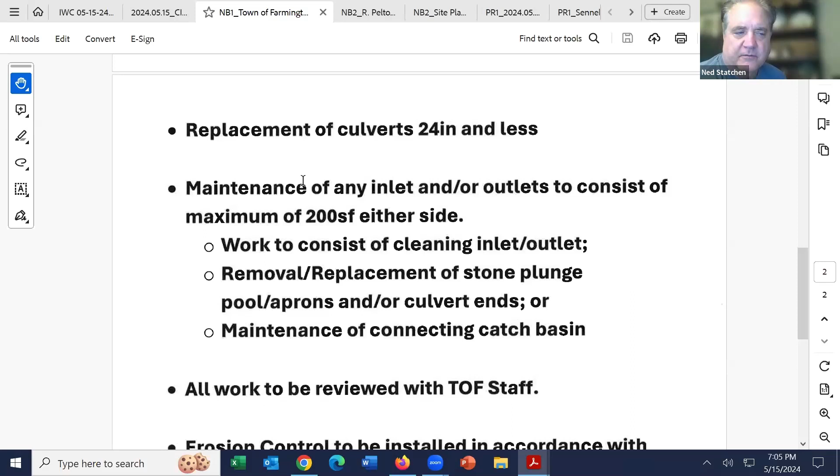This is Rich, so moved. And a second, Dave will second. Okay, the motion's been made and seconded that this is not a significant event and it's more maintenance. All those in favor say aye. Aye, aye, aye. Opposed? Abstain? Okay, motion passes.

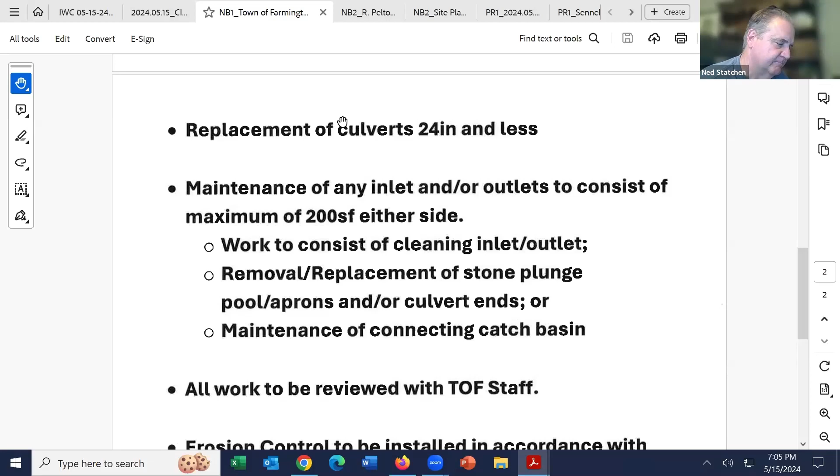Good luck with it, Bruce. Thank you. Oh, no decision? No decision. Don't let us down. I did vote on that. Don't we have to vote? Yeah, we have to vote. Oh, sorry, oh my gosh. I thought that I was. I had a tough day.

All right, so that was just for the significance vote, it's not significant. Now I'll entertain a motion to approve the application. This is Rich, so moved. Second, Mark. Whatever, whatever. Okay, motion's been made and seconded. All those in favor, say aye. Aye, opposed? Abstain? Okay, motion passes.

Thank you, commissioners. I'll sit down with the highway department and we'll go over this step by step.

All right, so the next item on the agenda is 161 Talcott Notch for a solar panel array. Is the applicant here to explain the proposal? Yes, I'm here. Just introduce yourself and what you're here for. Yeah, my name is Thomas Kenney. I work for EcoSmart Home Services, that's the DBA name of R. Pelton Builders. They're a local family-owned company, run by husband and wife.

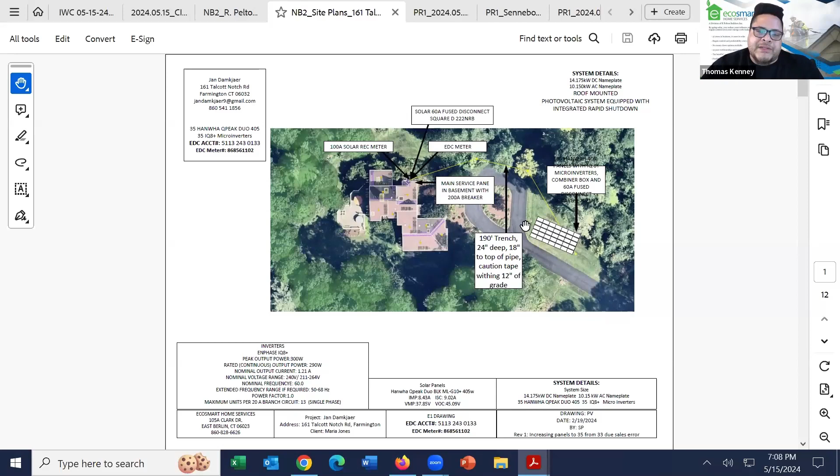So what you're looking at here is the site plan we submitted to the utility, Eversource. Unfortunately, we're redirecting the trench away from the wetlands, so it'll be a shorter conduit run and trench. The trench is about 190 feet long. It's a shorter run from the ground mount system to the meter and electric panel.

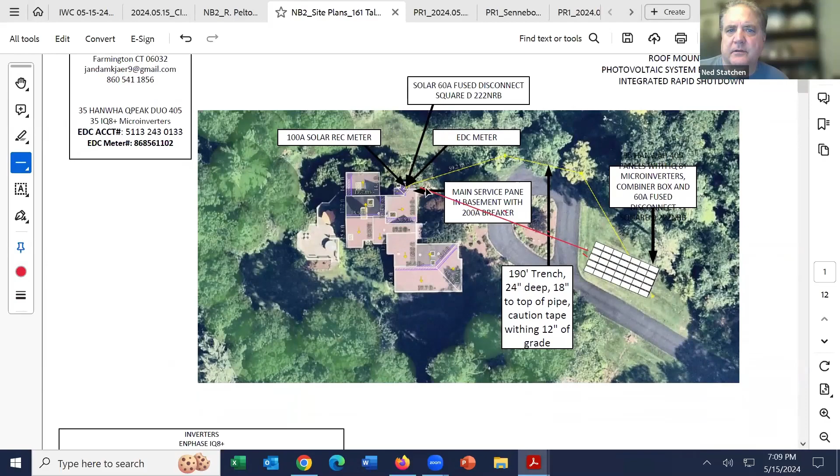A question for Bruce: whereabouts is the waterway or wetlands on this? I can answer that. Here's the house, and there's the portion of the driveway. Let me zoom in. Talcott Notch is up here, north is up, the driveway comes in, here's the circular driveway, here's the house. The array is going in roughly here, crossing the driveway to here.

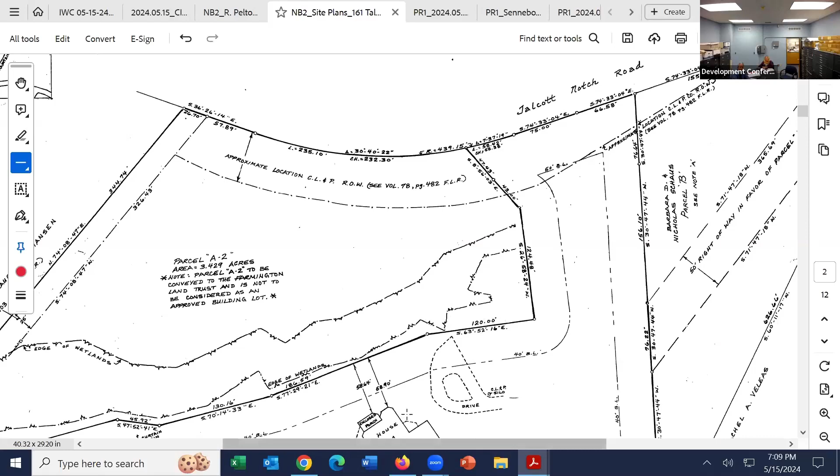The wetlands are in this area, which is conveyed to the town of Farmington as land trust property right in here. There's the wetlands right in there, so they'll be running that through this disturbed area. Let me zoom in here to help you guys out a little bit.

So Talcott Notch is here, Mountain Spring Road is here... sorry, the other way... one more, 161, sorry, 161. Right here, the house is right here, Talcott Notch is here. The array is right in this area here, and the wiring will be here. The wetlands are all up in here.

These flow down, run underneath Glen Eagles as I said, and come out and eventually run out to the Farmington River. As you can see, it's all lawn in the upland review area and driveway, so there's no tree clearing as part of this. No, there's no tree clearing at all.

Bruce, if you actually use the map layer on the right-hand side, you can select the wetlands layer. Yeah, exactly, so that's right down in here, and this is the Farmington Land Trust property. Sometimes when you turn that on it's not accurate because it's showing it on his property, and it's not. So based on that map, it's really all on this property here.

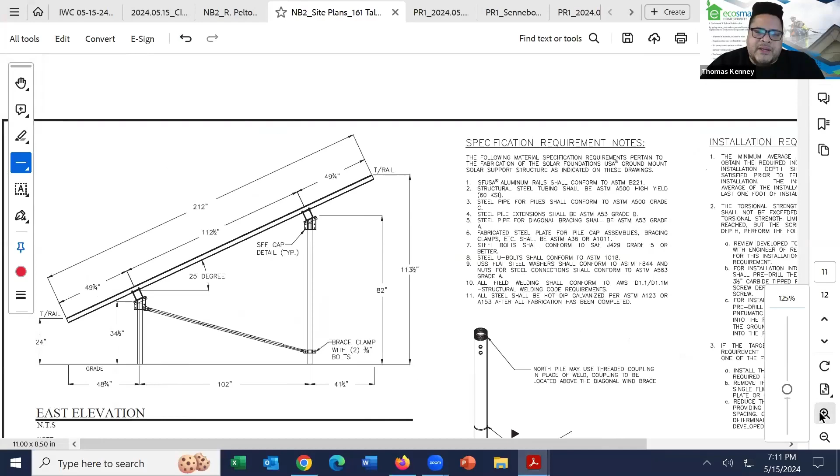Can you tell me a little bit about the construction, and how large the post is that's going to be holding up the array? Yeah, it's going to be a helical pile, like screws, if you will, that'll be used. I think there were some other documents in the attachments. We had this engineered by Solar Foundations, who does a lot of our ground mount projects, and we also provided a letter from the engineer at Solar Foundations. So it'll be like a helical screw.

So it's not going to be a big impact on the ground or anything like that. We do have to run a trench and conduit from the ground mount, but it'll be very low impact for the ground mount installation. It's a helical pile screw, basically. The helical pile is only a 2 7/8-inch diameter schedule 40 pipe. If you've ever seen those go in, they pull up with a little skid steer with a pneumatic screw attachment, just go right over the top, turn it on, and it goes right down.

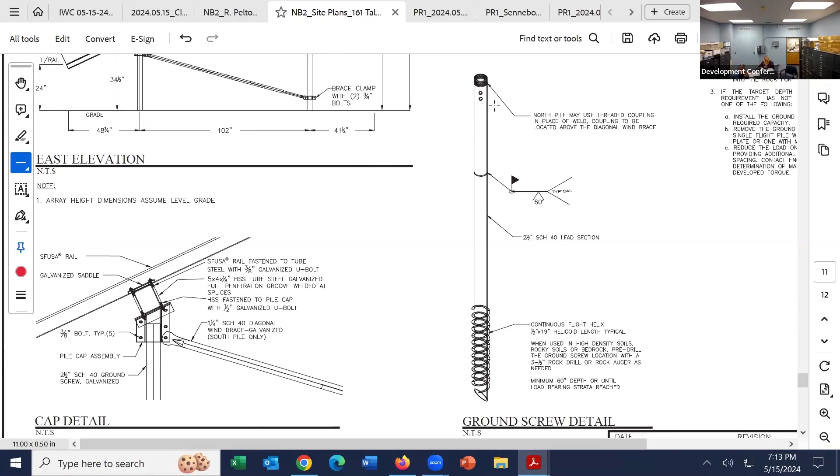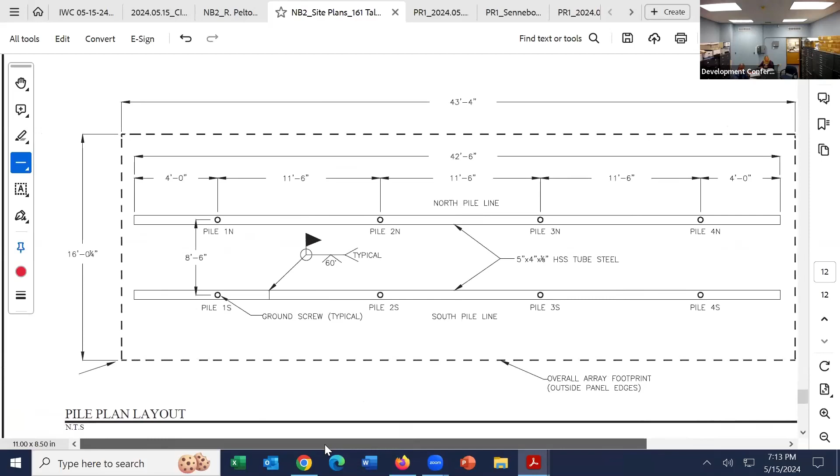The array is just over 43 feet long by 16 feet wide. Okay, back to the site plan. Here's a picture of the driveway - the array will be in this area here, right Thomas? Yes, I think you can see the yellow poles there in the photo. Yeah, right there, right here.

All right, well, let's ask the commission if they have any questions. Rich, do you have any questions?

Not really. I just saw in the picture, it looked like there was a couple dead trees there on the edge. I'm just wondering if you're going to take those down before the... Right here. Which are those?

This is early in the year too, Thomas, right? Yes, it was. So originally when we did the site survey, our technician went to the site during the winter time, and then we had to go through the process of zoning with the zoning board of appeals. So we went and took some earlier photos. I think this was February or so.

Oh, okay. So these trees may not be dead. They may not be dead yet. Yeah, no, okay, they're not a good enough picture.

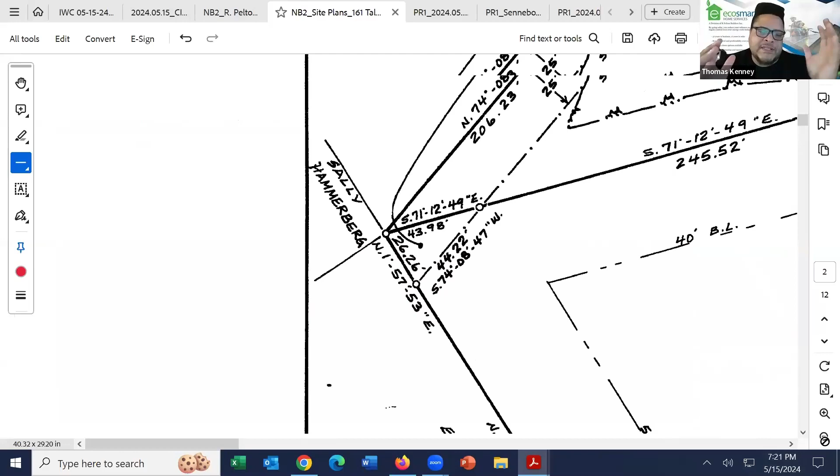It's not going to be a standalone inverter, because part of the home is actually in the wetlands too — the western part of the home is in wetlands. So there's going to be microinverters versus a standalone inverter unit outside of the home. There's not going to be any standalone inverter placed outside; it's going to be right behind the actual solar array.

So the area underneath the array is going to stay just as lawn. Can you repeat that? Beneath the array is just going to leave the grass there.

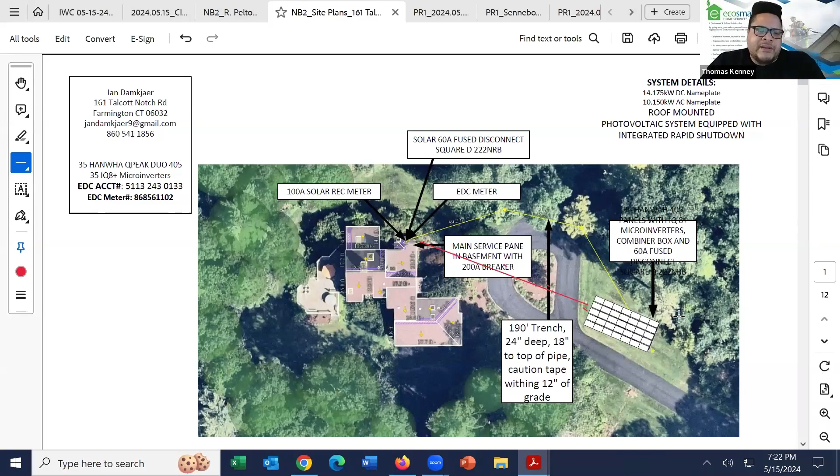I think typically solar foundations will lay something like hay around the ground mount. I know Garrett, the assistant town planner, mentioned something about stones, like 2-inch stones, for possibly a stormwater prevention plan. But the engineer from Solar Foundations suggested there wouldn't necessarily be a plan needed for stormwater prevention.

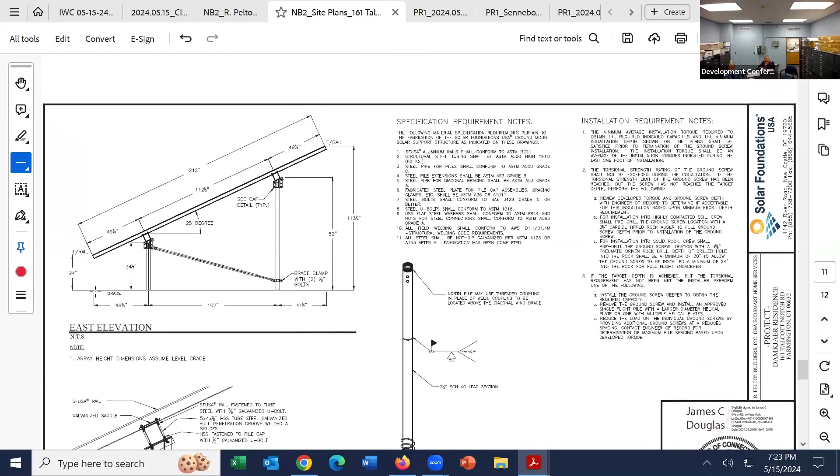Just to give everyone a little insight — where's the best plan, there we go — what happens is these are technically an impervious type surface, so when the water drop hits, it runs down through here. There are some studies, and DEP has some applications on it, but at some point you may need a little stone trench at the bottom, because as the rain runs off, depending on the angle, size, and storm, you may get erosion at the drip line.

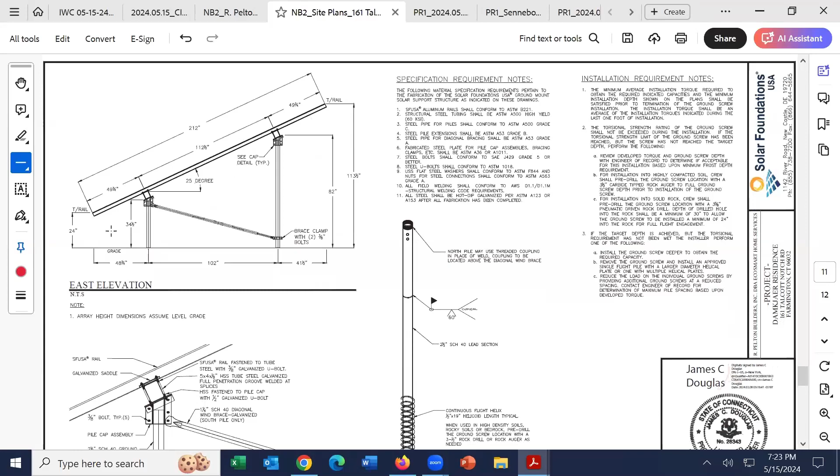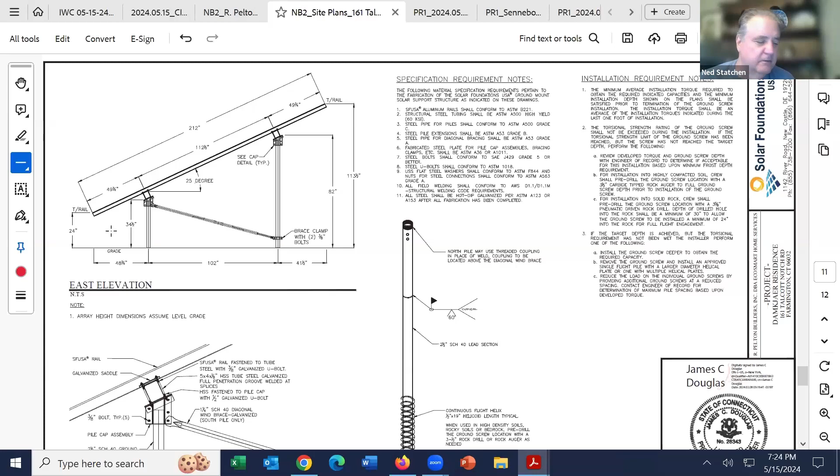So some people will actually run stone along the base to prevent erosion. I think we had made that recommendation on a previous project. And with this being kind of one big panel, since they're all stuck together, it's probably pretty important to have some protection along that drip edge. That's all I have. Yeah, I tend to agree, because we don't want them to have to come back if they start getting an erosion problem — go through another application process just to install some crushed stone in a drainage trough.

Bruce, can you go back — are those panels tight in between each individual panel, so will the water run down the full length? I could provide a photo in the chat of a recent ground mount we did in Goshen — there's probably about a half-inch gap between each solar module, so it's not super tight, just a slight gap in between. During a heavier storm, I'd expect it to just bypass that gap. During a smaller storm, it may hit that drip line and fall in, but in larger storms it's probably just going to sheet right off to the bottom.

Mark Simpson, do you have any questions? I think the commissioners have said enough so far that I have no further questions. Okay.

All right, so the first thing we have to do is accept the application. Can I get a motion to accept the application, please? Dave will move that, and Rich will second. Motion is made and seconded to accept the application. All those in favor say aye. Aye, aye, aye. Opposed? Abstain? Okay, motion passes to accept the application.

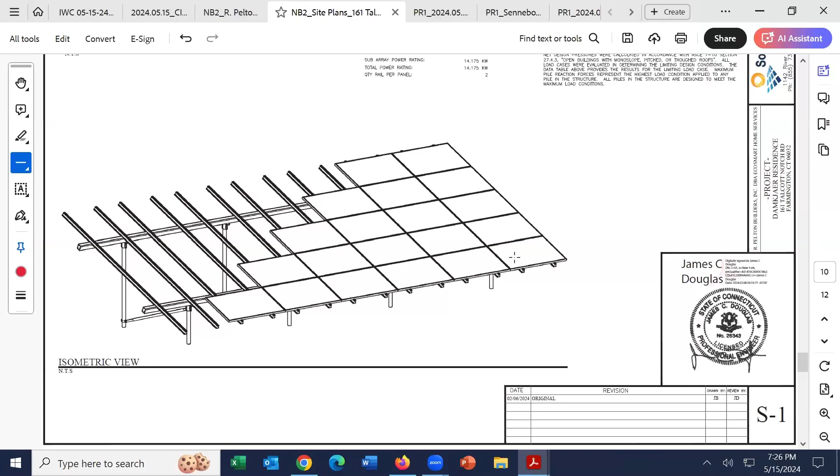So moved, Mark. Okay, moved by Mark, seconded by Rich. Motion has been made and seconded that this is not significant. All those in favor say aye. Aye, aye. Opposed? Okay.

So, I think for the next meeting, when we act on this, if you can come back with a plan for just a small stone trench at the base, at the low side, I think that would be helpful.

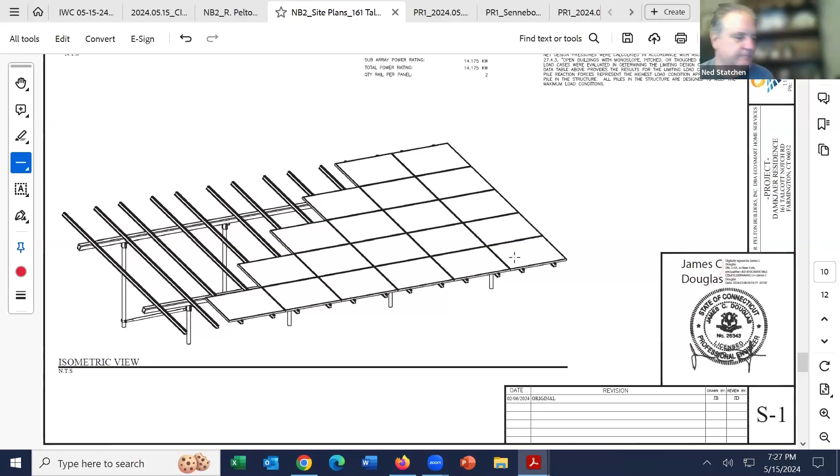And what is it, a standard trenching machine, the big wheel type that puts the conduit down? That I'm not too sure. I'm basically a very technical salesperson, I'm not in operations, so I don't know all the pieces of equipment. I'm still working on getting certified in certain things to learn more about the operational side. But I'm pretty sure it might be a standard trenching machine, though I personally am not aware of what kind of machinery they'll be using.

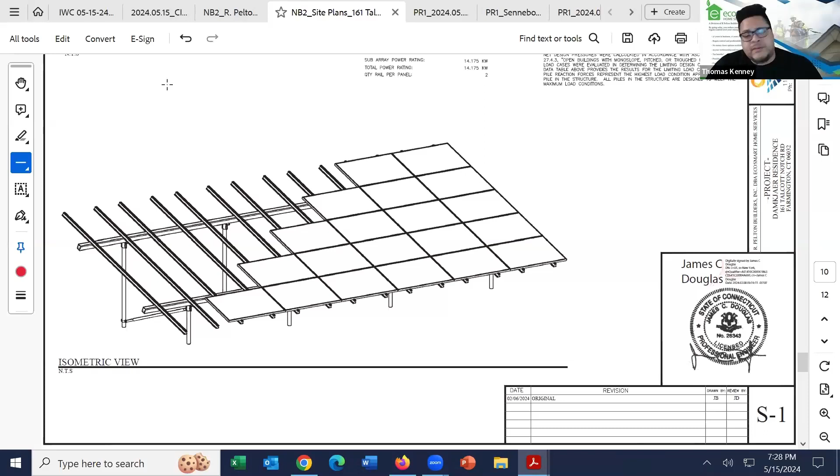The solar foundations team will be building out the ground mount system, so unfortunately I could not have them present today. But one of the engineers was able to provide some material and a letter explaining more of the technical side of things. I'm not too sure if you have it, but the technical part is written up there.

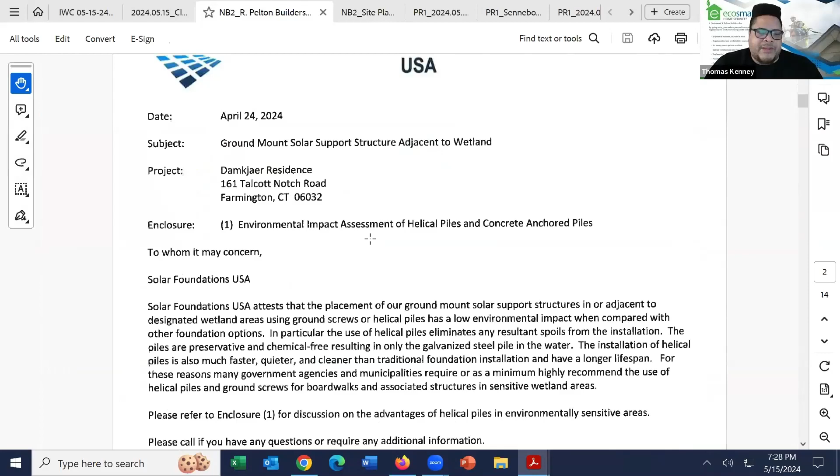Oh, sorry, I thought you meant the person online. The engineer unfortunately wouldn't be able to be present. I mean, unfortunately all it is, is a report based on all the helical piles, and it goes into pages and pages about how they get installed and things like that.

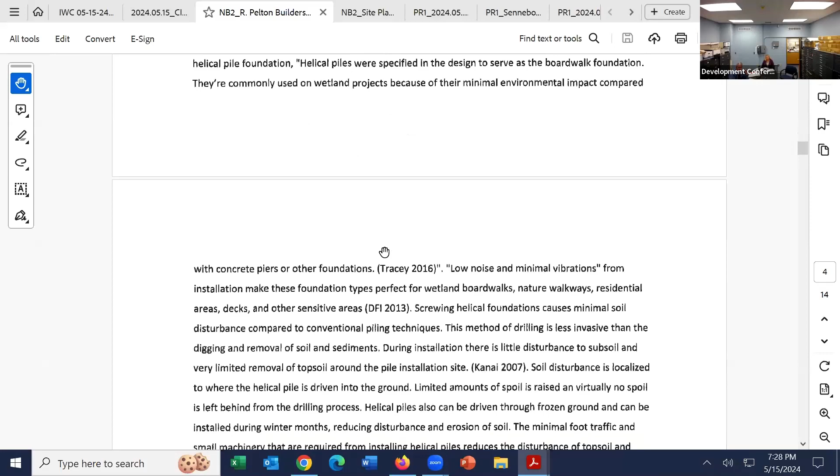I don't envision it being a trenching machine because they have to go through the driveway. So I'm assuming the largest they'd have would be a small mini excavator or something. What is the size of the conduit?

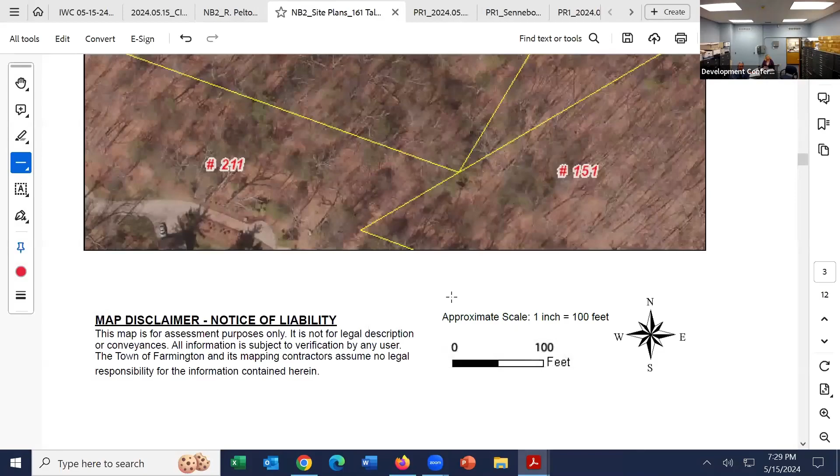Look on the other plan here. That was like a 2-inch, right? I believe it might be. 24 inches deep, 18 inches to top of pipe, caution tape within 12 inches of grade. It doesn't say the size. I think it'll be, because of the voltage drop, like when you're doing large trenching and conduit runs, voltage does drop, so it's going to be a pretty decent size wire, cable I should say.

So probably 2-inch, or yeah, 4-inch. Yeah, I think something around there, they would probably have to use one of the small mini excavators. It looks like it's a 6-inch pipe. If it's going to be 24 inches deep and 18 inches to the top of the pipe, then that's going to be 6 inches, so probably a 6-inch pipe. All right, so then it would be a mini excavator, yeah, the trenching machines wouldn't work.

All right, just to confirm that we don't want a site walk on this. Does anybody feel we need one? I don't think we do. Rich Berlandy, would you care for a site walk? No, I think the photos and what we've seen describe it. Dave Fox, yeah, I agree, we have enough info here. Mark Simpson, no site visit. Okay, yeah, and I don't think we need a site visit. Perfect, all right.

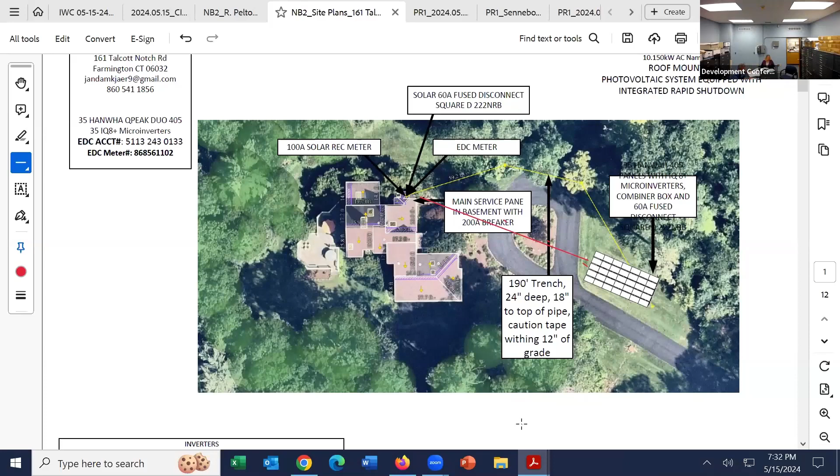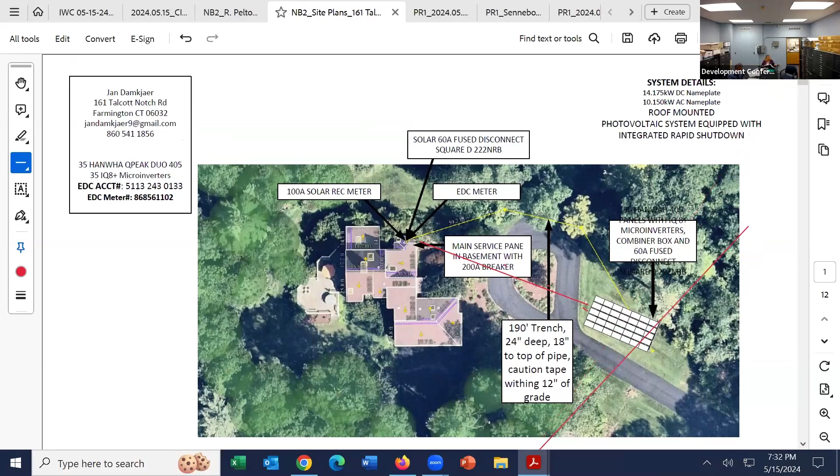The next item on the agenda is a cease and desist update on 1509 Farmington Ave. No update at this point, still waiting for the payment, and then we're gonna process it through the municipal hearing process.

And anything for a planner's report? Yes, I have a handful of items, so if you could just bear with me. Okay, all right. Close up.

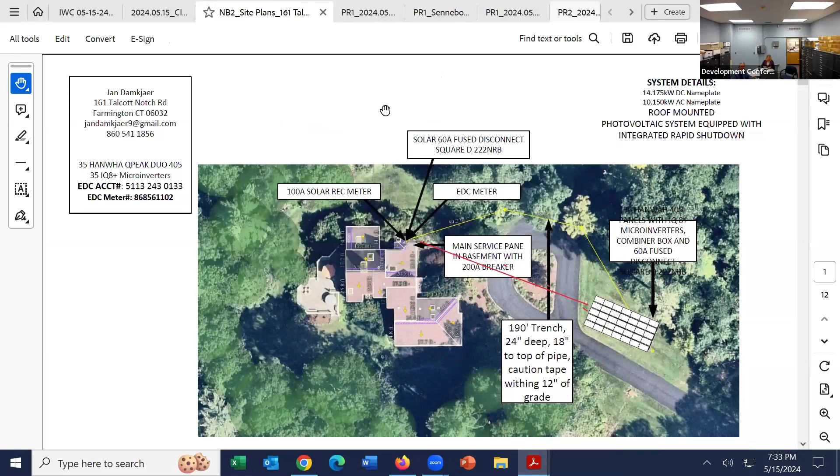All right, planner's report number 1. I did talk with the chair just to give everyone a heads up. A week from last Friday, we got a call from the highway department late in the day while we were going over some projects for the week. They informed us of some trees that are down in the river. Let me go to the map - this is over in the flats.

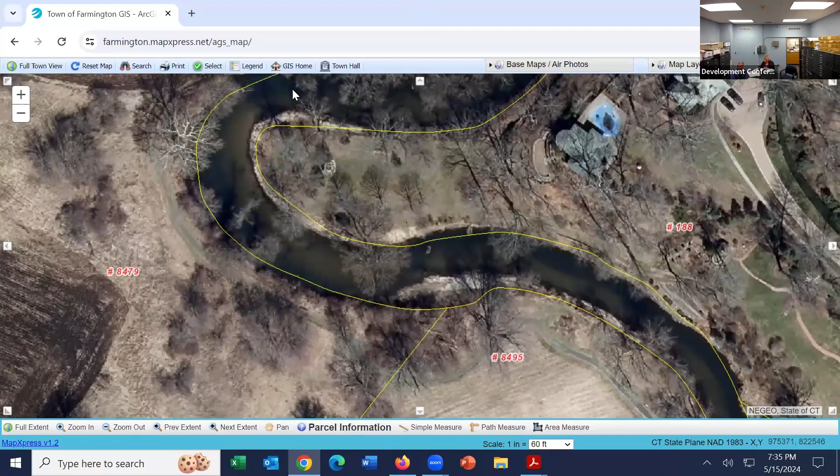It actually started to go around the tree and erode the embankment, you can see that in this photo. Right in here - the farm fields are straight ahead. That tree had fallen, these trees had fallen here, blocking the river. It was coming down, eating into the embankment, coming around and working its way down. You can see right here, look at the large scour it had taken out - it's eating away at the road.

So with the rain coming, they felt there was an emergency to get this done, so they contacted me. I called the chair, we discussed it, made sure we had no problem because we didn't want to wait till this meeting just in case. What they ended up doing was cut the trees and leave the stumps, because the stumps are embedded into the embankment, so we didn't want to disrupt it. So the intention was just to cut the tree and leave the stump in the embankment. You can see this tree had fallen, as it came around and ate at this and scoured out this part of the embankment, this tree started falling.

These trees were cut using what we call a Sennebogen - you've probably seen these around. It's on 4 tires or on 2 tracks.

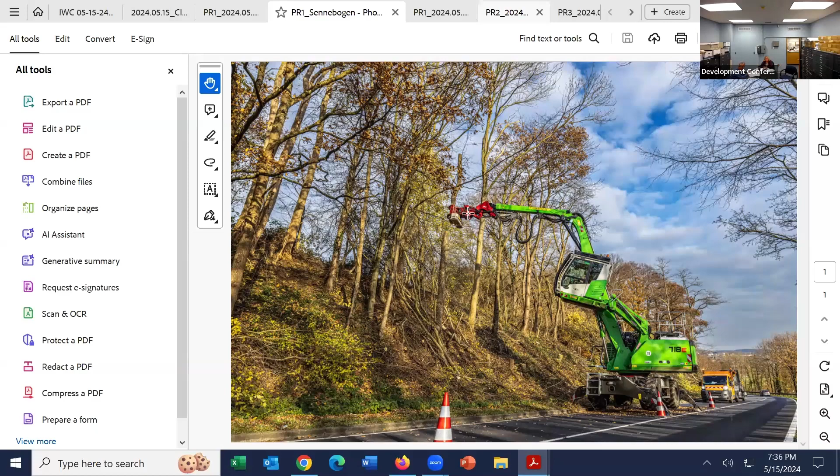What this tool does is grab the tree. It's got a saw built into it, cuts it, and just takes the tree, turns it, and drops it on the ground. So there's really no impact to the stream, the wetlands, or anything.

It was a plus. They had called the contractor, he had it in the area, and he said he could get it over on Monday. So they ended up doing that.

As part of that, these trees were starting to pull away and lean over, pulling at this embankment. So these trees weren't cut. All they did here is trim them off.

That's another view of the embankment eroding from where those trees had fallen, blocking the Pequabuck. What they did here is cut a limb off just to take some weight off this tree. We don't want to cut it, but it was starting to lean, and if we lose this, we're going to lose the embankment, and it's just going to be a never-ending fight.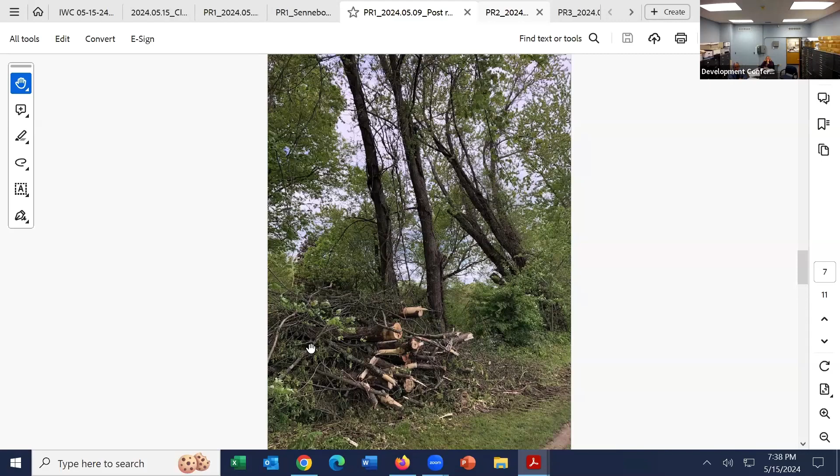You can see right here, these trees were leaning. They cut this limb up here just to take some weight off the tree. This debris they pulled out as much as they could at that time. This debris was stacked as of May 9th, so they're coming back to grab all this and bring it over to have it chipped up.

While they were there, they called me and said, hey, we have a couple more trees in the Farmington River. You can see here, two of them had gone into the river, again blocking it and causing flow to be directed around. This is all corn stalks, if you're wondering, from the flood.

Every time it floods the farmer fields, it all gets picked up and deposited down along this edge. So what's happening is when these trees fall, they're actually pulling this embankment with them. Again, a concern because the road is right here and we're starting to lose this, and with the trees down, it's scouring along the embankment. I walked on this and it's spongy, it's all ready to go.

So we had to get these trees off of there so it doesn't fall and pull that embankment over with it. Go back to the post photos and you'll see where they cut this but left the stump so we don't damage the embankment. So two of them were down and two of them were dead.

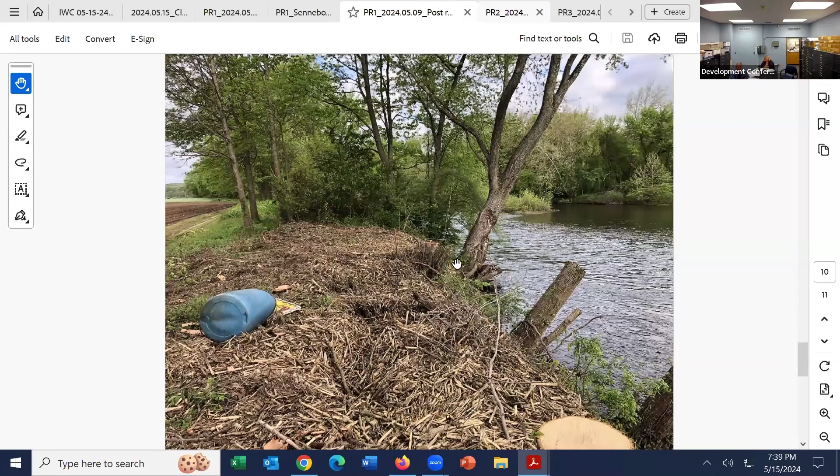The ashes were dead, so while he was there he said, look, I'm cutting these dead ones because I'm going to be back here in six months to do the same thing. So you can see they left the stumps. Again, the machine just grabbed it, cut it, and dropped it over here.

So it was just an update. Again, unfortunately, something we would have permitted, but when I got the call on Friday afternoon around 4:30 that we had a problem, I called up the chairman that night, and we discussed it and said just go ahead and get it done. Then I'd bring the commission up to date.

So we will keep an eye on this, make sure something doesn't move, and if we need to come back, we'll definitely address it with the commission at that time.

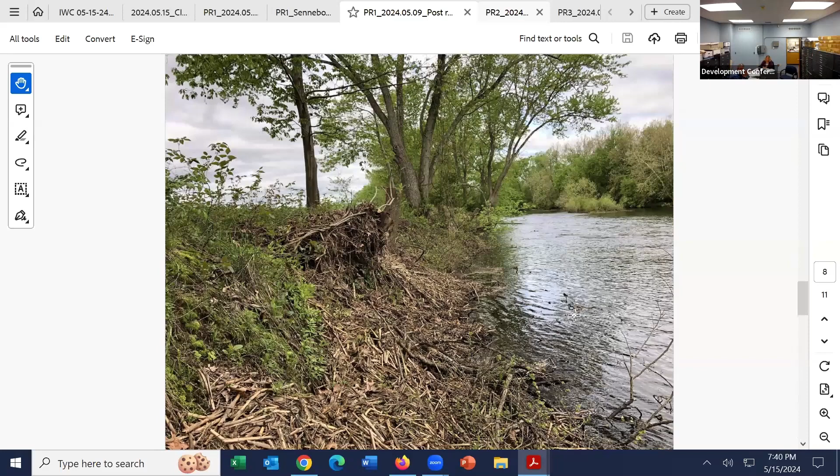Do you think we need to do anything with some of the bare soil embankments? Oh, our heads were spinning on this one. I think at this point we may just monitor it. I'm not sure what to do. We were thinking about this - if we put the material back, is it just going to wash out?

Do we look at putting a wall with stone? It's some pretty good flows. So I think we could wait and see, and maybe it'll self-vegetate again. Hopefully it'll stay. But we do have quite a few people in the office that hike that on a regular basis, so we have a bunch of inspectors on there fairly often.

If it does continue to eat away at each storm, then I think we're going to have to do something, whether it's some kind of stone protection or otherwise. It's such a beautiful area, you want to keep it natural-looking and not sticking out, but we also don't want the whole slope continuing to eat away.

Definitely. And we think with the trees gone, the more normal flow should start to take over. You might even get some sediment build up - you could get the sediment as it's coming down, making the turn, and it could all get pushed into here, filling back up over time.

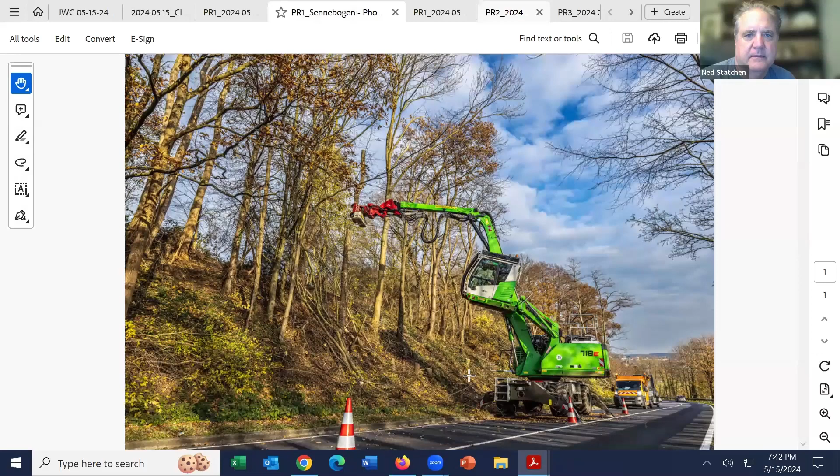I saw the equipment get dropped off on Friday, or maybe Saturday morning. I saw the machine you were mentioning, this Sennebogen machine, was placed there. It actually works out great because you don't have to put anybody in the wetland. It grabs it and takes it out.

The only problem we had, and I forgot to mention this, is they forgot this tree. Our highway guy went back out, and the guy said, we forgot. So they're going to have to come back to get that material out, and see if they can just pull it out. It's a small tree, so they may just grab a hoist, pull it back, and cut it.

All right, thank you. Oh, no, thank you. All right, that's that one.

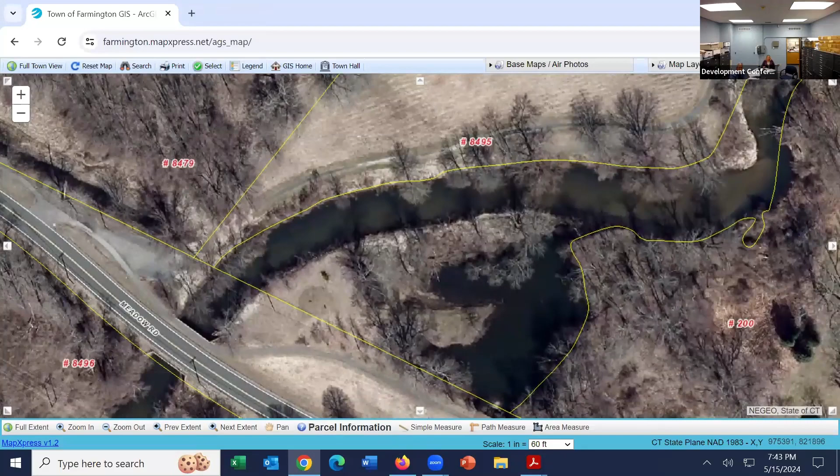Next one, just in case anyone's down in that area and wondered the same thing, right along the trail on the Nancy Conklin Trail, right down in this area, you'll see some black plastic sheets out in the field.

The Farmington Land Trust, we called them and asked what was going on because we were getting calls too. They said they got a grant to do some invasive species removal and monitoring. It's almost like a 3-year program.

What they do is put this black plastic down to kill back the invasives, and they leave it there. There's a lot of mugwort, they said. The plastic gets installed with sandbags and some staples to keep the poly in place, especially if that area floods. The land trust will review it next year to see how well they succeed in deterring the growth of the invasives, and then cover it again. In the 3rd year, they'll come back and plant some pollinators in those locations, then move to another area.

So the intention is to get rid of the mugwort and plant some pollinators back in there.

Anybody have any questions? So that's a 3-year process? That's what they said, I was surprised as well. They did get a grant, and I guess that's just to make sure, because I can see where if you put it on there for the first year, it'll die back, but the seeds could drop off and grow back the 2nd year. So I think it's part of a plan to try to do something less invasive, no chemicals or anything like that.

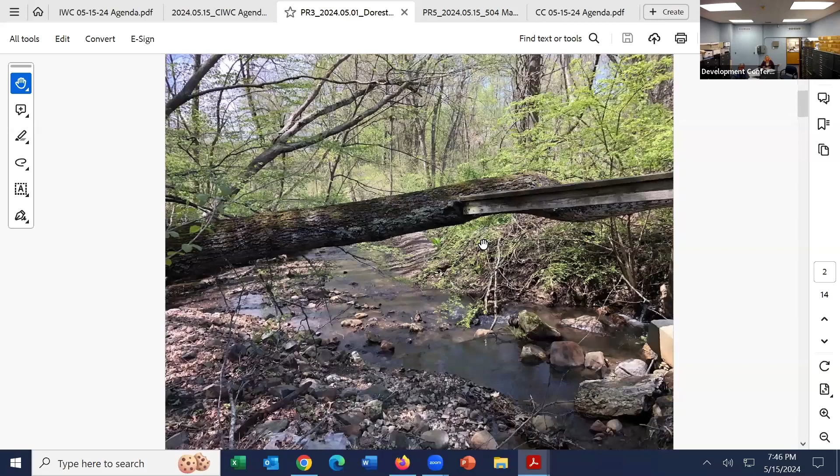Here's the downhill side of the dam. You can see sections have just been moved and broken away. It looks like someone tried to install this weir plate a while ago, and put some rebar in to hold it.

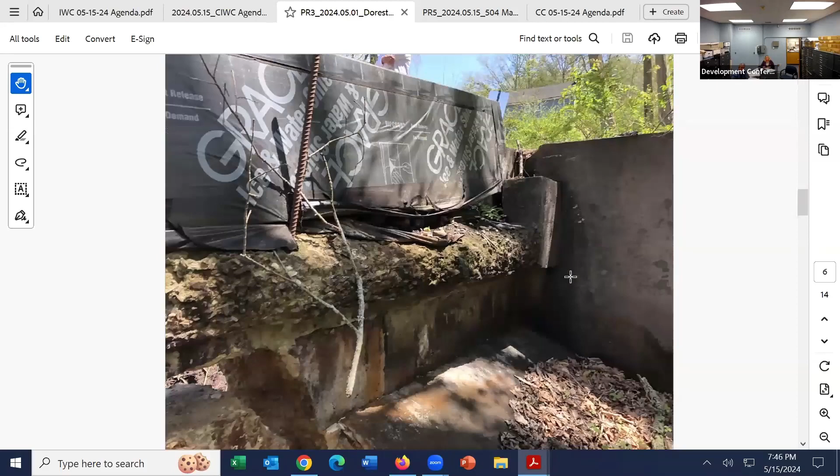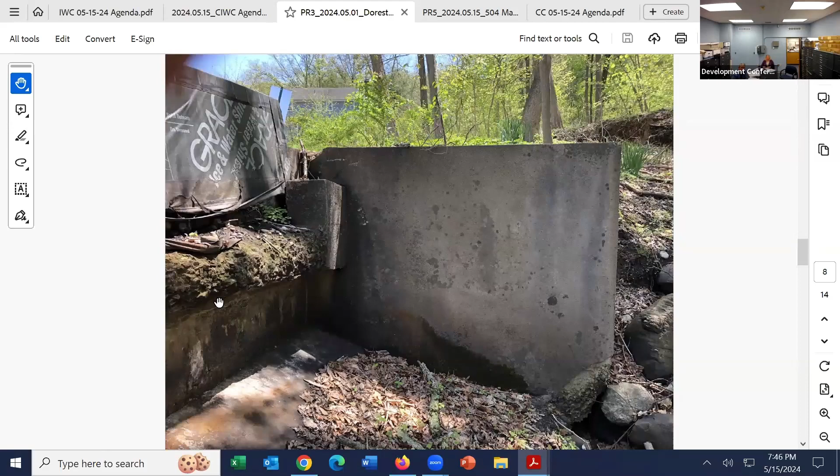But Mother Nature wins, I guess. You can see it was pretty interesting work they did. It looks like it's a sluice, and it looked like it was hand troweled, but it does have a little curl at the end, so the water comes in and curls up and slowly comes right back into the river. Some old history in there, you can tell. I think it controls the turbulence a little bit. And it looks like the owners had researched it, and it was a farm, so a cow pasture or farm pond is how it got built.

So this was in late 2022. They had contacted DEP. DEP had reduced the hazard classification of the dam, more or less meaning it's not really a dam anymore. The homeowners were working together to try to rebuild the dam, working with a soil scientist and an engineer. It sounds like the cost may be too overwhelming for the association to take on themselves, so it's not guaranteed, but it sounds like they may be abandoning the dam and just leaving it as is.

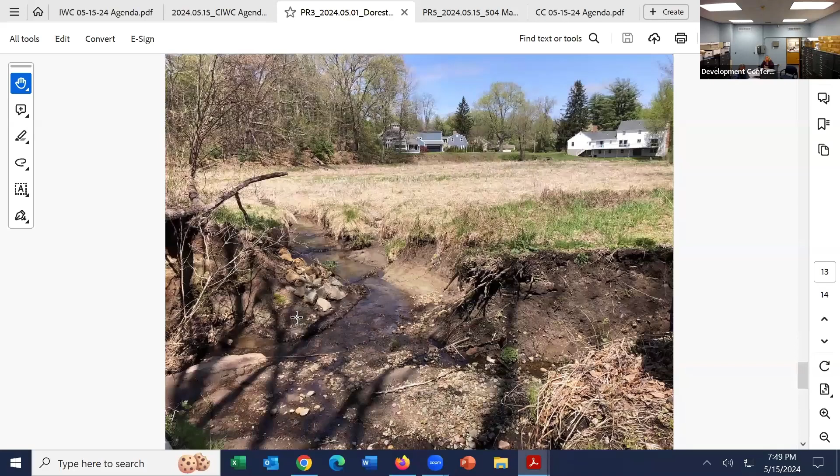It will turn into a meadow area. They will keep us in touch if something changes, but unfortunately there is no real HOA and there really is no easement, so this homeowner technically owns the dam, and this person has only been there for a few years. So she does have some concerns with some safety, so she's working with a contractor to at least pull down some of this stuff, like take down the weir plate, maybe some of these blocks.

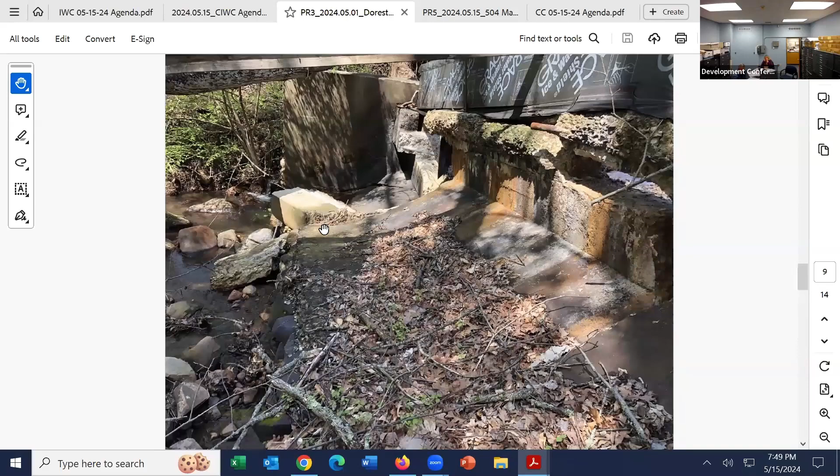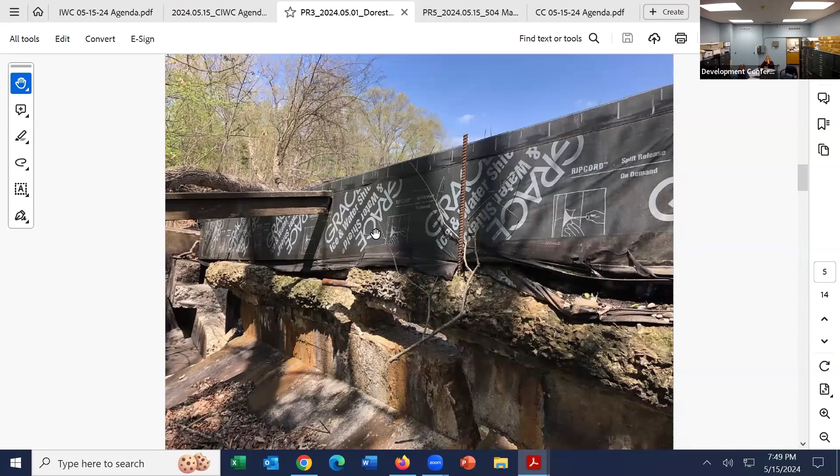And as you can see, where was it, here's the weir plate, and somebody built it out of a 2x8, 2x6, half of an I-beam, and you can see they put it up against the tree. So that's what's holding the weir plate in, the tree on the ground, yes exactly, the tree on the ground. So she's going to want to take down some of these components, so it's not a safety issue anymore. She would hate to have someone go back there, fall, and get hurt.

So we did talk to her about, we definitely don't want to go lower than the pond and then completely move this all out. So we talked about bringing it possibly down to this grade here. She is working with some contractors to get some pricing. We did tell her that, depending on what work they do, we definitely want to bring it back to the commission, and at that point the commission can determine if a permit is required or not.

Yeah, I have a little information. The dam is on one person's land, but I think there's seven people that kind of have frontage on the pond. One of the persons had asked me if I would go out and take a look at the dam. I said, I'm sorry, you're a good friend, but I'm not getting into that ball of wax, no way. Because if I see something that looks dangerous, then I have obligations on me to deal with it. So I'm a bridge inspector, I'm not a dam inspector.

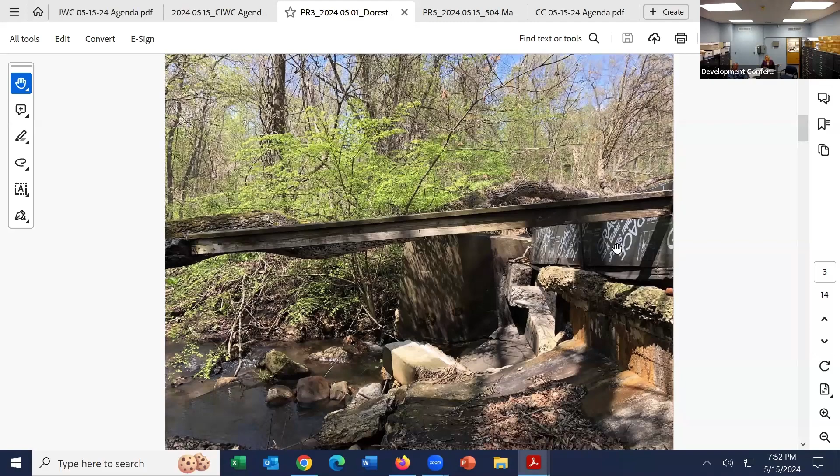I'm not sure what happened, I'm not sure if something just finally cracked. If you look at this as an engineer, it almost looks like this is where it failed. It may have dislodged, and then the water just started seeping through, and then it fought its way around and eroded. So as you can see right over there, how this just gave out too.

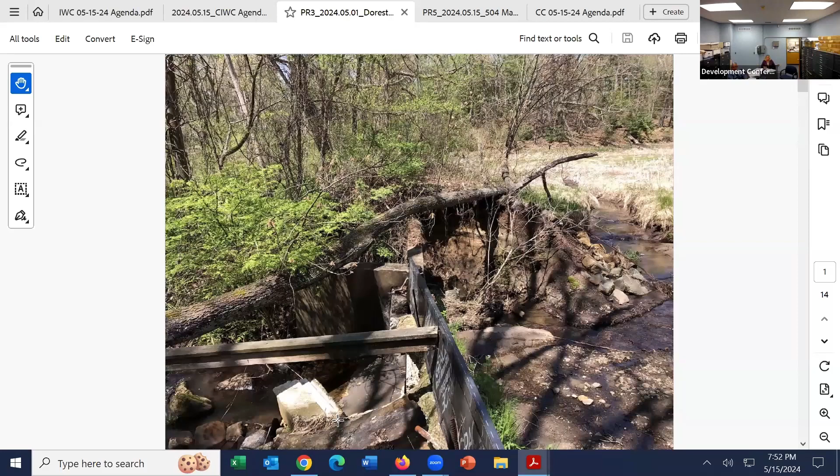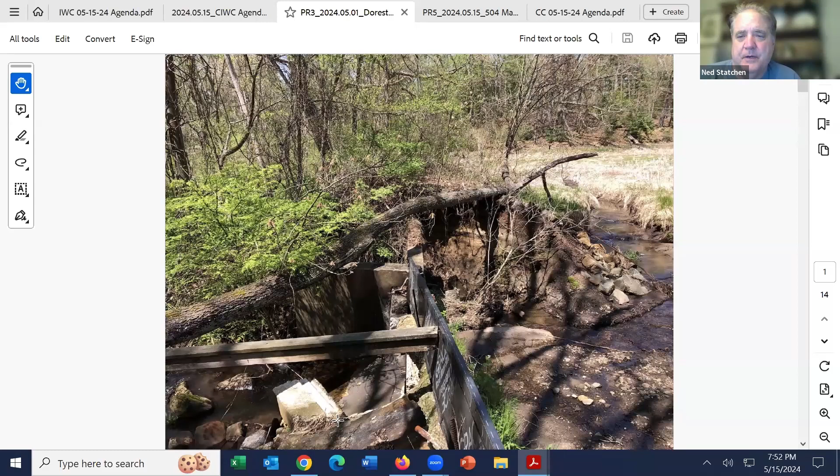The area upstream of this, where the stream comes down, has some pretty steep grade with waterfalls. When driving by on the road, I had some concerns about undercutting further up where it gets really steep going up the hill, unless it's a different water course.

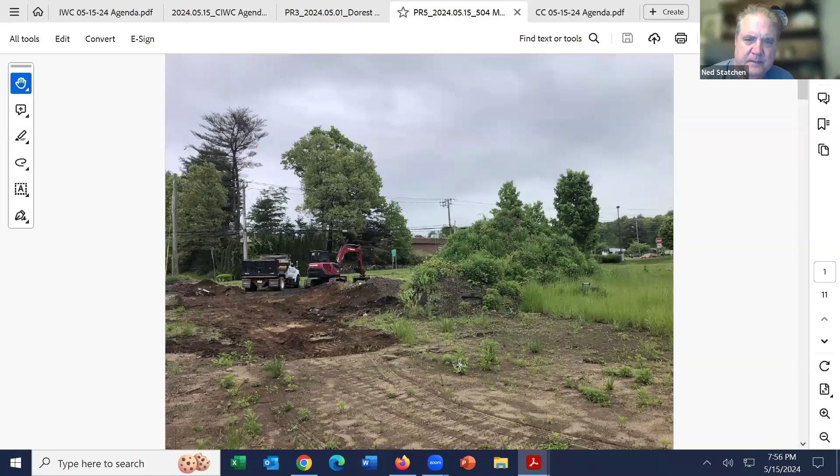One more planner's report. Just to give everyone a heads up, I met with the owner at 504 Main Street. If everyone remembers, this was the one at the edge of the Plainville town line. He does have his landscaper on board now - we met with the landscaper and walked the area.

Here's some pictures. The grass is all rye grass - perennial rye - and it's looking very well established. It is rye grass, so if you're familiar with it, it's not a turf lawn, not very tight. There are some thin spots, but for the most part it's well established. He's in the process of pulling out this fill pile, or rather the topsoil that he had scraped up.

So we met with his landscaper. This is the area that he needs to lay back and soften the slope and seed it. The erosion control looked good at this point, but we talked about seeding that area, and then this whole area here is where all the wetlands plantings will go.

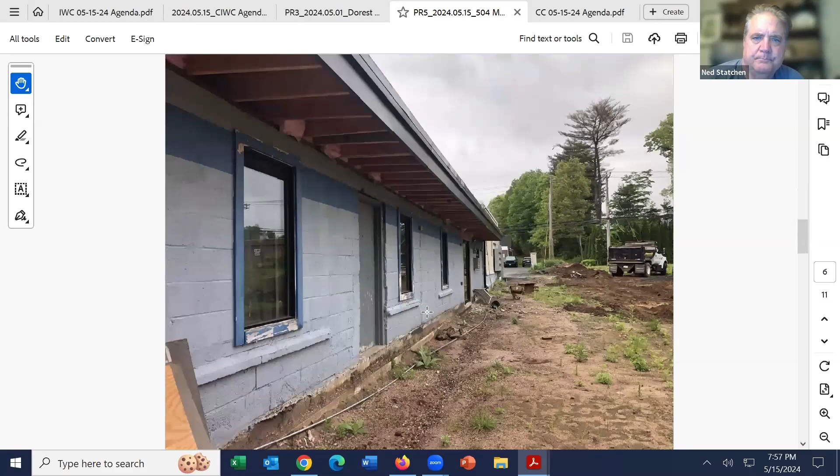After I left, he sent me a picture - the plants were dropped off right here, so the plants are there, which is good. They're going to weed whack this area first so they can get the plants in, because it's very tall, almost like 3 feet tall. So they're going to weed whack this whole thing down.

Just in this area right now, get the plants in. They're going to put a mulch ring around the plants. I asked them to put a driveway marker stake or a wooden stake at each plant location so that it could be visually noted, and someone can go on there regularly and keep the grass cleared away from it, because if the grass isn't cleared, it could overtake the planting. So you just want to keep some air flowing through there so the plants can survive and grow big.

And I told him that once they get larger, the plants will pretty much take over from there. Everything else, once he thins it out, he was going to put that New England conservation seed mix, the restoration mix, all along here, and that'll grow in. So at this point, he has no intentions of doing that parking lot he talked about. He's still working with the building itself, and there's lots of issues and costs related to that. He's been spending most of his time getting the building back up. That should hopefully be happening within the next few weeks, and hopefully by the next meeting I'll be able to show you pictures of all the plantings in.

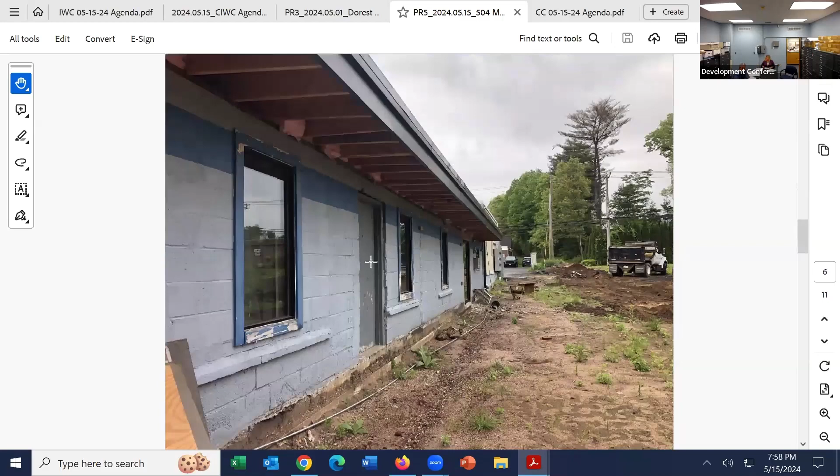It's Rich. Was he ever able to actually get ownership of that parcel?

He told me he's got 6 of the 20 people signed on. Some of these heirs don't live around here, and I guess when you find out your great grandfather owned some property in Farmington, it's probably worth a lot of money, right? So what they don't realize is that it's useless property. It's very minimal, like he said, it's landlocked. The line is wrong here, but it runs right through here, so this is all landlocked. They have no access to it. So it's just trying to explain to these people there really is no value to it.

But he is working through that, his attorney is working through that.

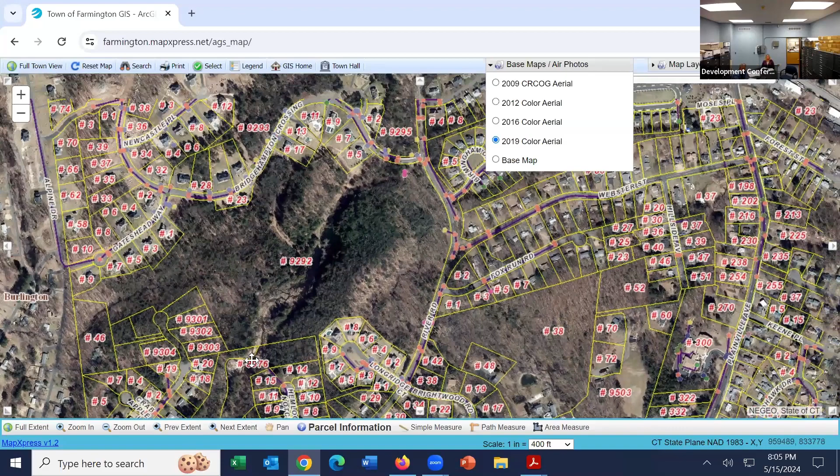If you back this up, this is the Unionville Brook, which actually goes all the way back to Lake Garda. The dam comes out, goes underneath Burlington Road, runs through a good part of town open space, goes underneath Bridgehampton, takes a right, goes underneath River Road, and falls through here. That's part of the problem - you've got a serpentine effect with high velocity that bounced and ate this out horrendously. They almost lost the trail and the sewer, which is why they were concerned.

While you have that up there - the area that was eroded before, that's the little bend just to the left. That's starting to eat into the bank now too. Our survey crew has been out there and surveyed it. They've hired a firm, I believe it's SLR, and they're starting the review. There'll be a long plan put together on how to address it, along with a planting plan. I think they may marry this up with the fishing pier project, so we're not sure how they'll handle it yet. It's eating in and getting close to undermining one of those trees there - a wash out again.

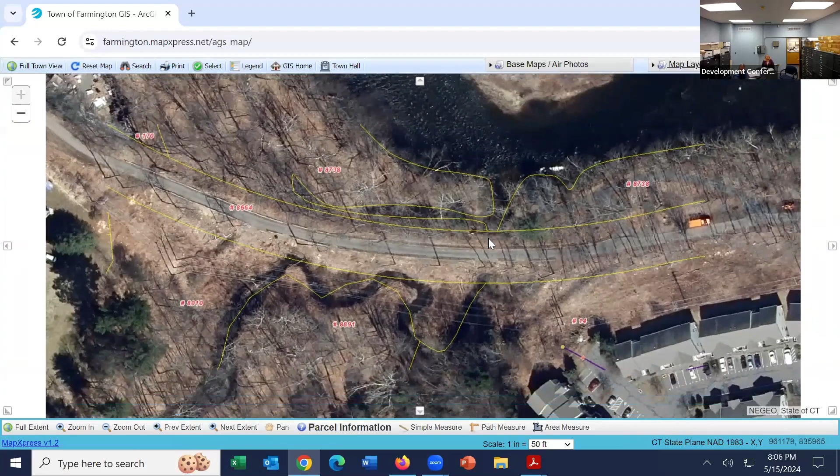So we have a sewer line underneath the bike trail right here - just a small one. There might also be a gas pipeline - there's gas in there as well. There it is.

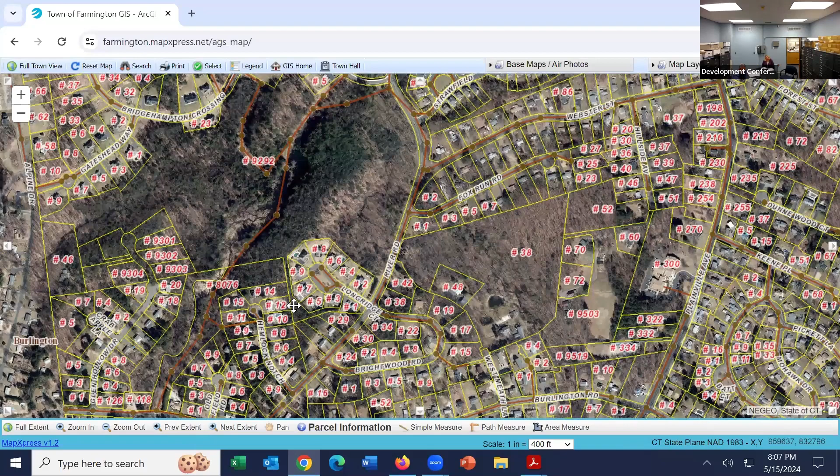To back this up, this takes everything from Hendrickson Lane and the Collinsville Bridge down - all of Bridgehampton, Strawfield, a good part of Webster, all of Lake Garda, and a lot of Burlington Road. So it's a lot of sewer - that's not one you want to break.

Especially at the edge of the Farmington River. You've got to pick your poison - emergency repair on the embankment, or let a million gallons go into the Farmington River. That'll be a project we'll definitely see in the future.

That's all I had, that's what I thought it was, because I used to stop there constantly with my kids. I wasn't sure from the way she explained it if I was in the right place, but I was.